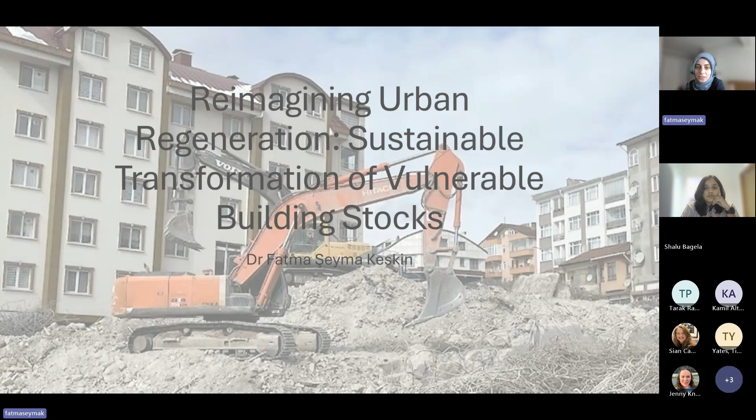Okay, so I will talk about reimagining urban regeneration for sustainable transformation of vulnerable building stocks.

Shortly, I will talk about myself. I'm currently working as a lecturer in the architecture department at Mehmet Akif Ersoy University in Turkey. I teach courses relevant to architecture, like architecture projects, structures, building materials, statics, structure analysis, and earthquake factor in architectural design. I hold a PhD in civil engineering from the University of Birmingham.

I have conducted postdoctoral research on the CDAS project, Center for Development of Postdoctoral Researchers in Cities, Infrastructure and Energy project, at Cranfield University.

My research area includes designing and analyzing buildings for urban transformation, with a focus on enhancing sustainability, resilience, and circular solutions for construction demolition waste, particularly in response to disaster impacts. This is my recent research area as well.

So I'm currently working with two research groups from Turkey, one from Hacettepe University and the other from Gaziantep University. I am working as a researcher under the Seyma engineering and consulting company for the projects Hacettepe University is managing, and I also work with ALab company for the projects Gaziantep University is involved in.

So today I will mostly talk about Hacettepe University projects. Our research team focuses on the production of 3D concrete, the recycling of construction waste, and the characterization of end-of-life materials, which we refer to as materials passport.

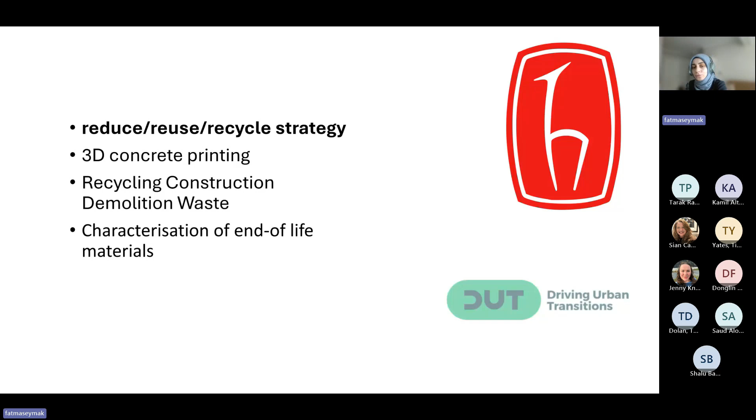Why do we aim for this material cadastry approach, material passport, for construction demolition waste? Because on February 6th, 2023, Turkey experienced two powerful earthquakes with magnitudes of 7.7 and 7.6. These devastating events caused widespread damage across an area of approximately 350,000 square kilometers, nearly the total area of Germany, affecting 14 million people.

This is about 16% of Turkey's population. The impact was immense, with approximately 400,000 buildings destroyed during these two earthquakes. In the aftermath, it is estimated that around 500 million tons of disaster waste were generated, highlighting the urgent need for effective waste management through reuse and recycling.

Furthermore, Turkey is in the midst of significant city transformation, for instance Istanbul, facing the challenge of replacing its substantial building stock. We have so many cities like that, not only Istanbul—nearly 90% of Turkey is under earthquake-prone areas, waiting for urban transformation of their vulnerable building stocks.

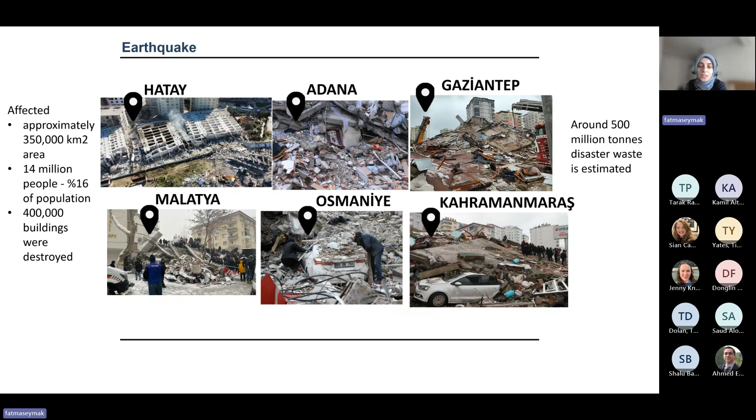This will result in high latent demand for raw materials and energy, leading to environmental and health concerns due to increased greenhouse gas emissions, carbon dioxide emissions, and the like.

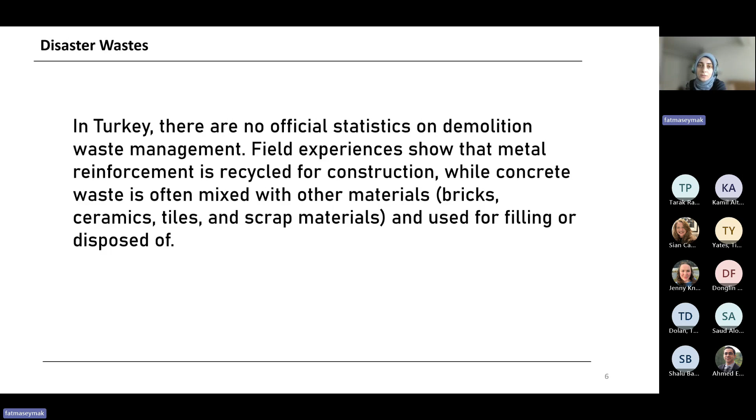So what is the situation in Turkey right now? We are very good at techniques related to construction waste, but there are no official statistics on demolition waste management or framework. Field experiences show that metal reinforcement is recycled for construction, while concrete waste is often mixed with other materials like bricks, ceramics, tiles, and scrap materials, and used for filling or disposed of.

What about the world situation? The recycling of demolition waste is being addressed within the framework of the circular economy policy in the European Union. In addition, the transformation of demolition waste into raw materials that can be used in the construction sector is one of the sustainable development goals that overlap with the United Nations Sustainable Development Goals.

How does it fit with these goals? Building resilient infrastructure, supporting sustainable industrialization, and strengthening innovation fits SDG 9. Making cities and human settlements safe, resilient, and sustainable fits SDG 11. And ensuring sustainable production and consumption patterns fits SDG 12.

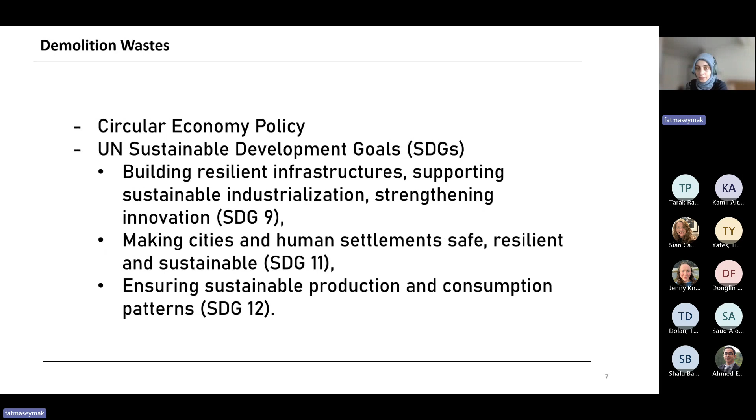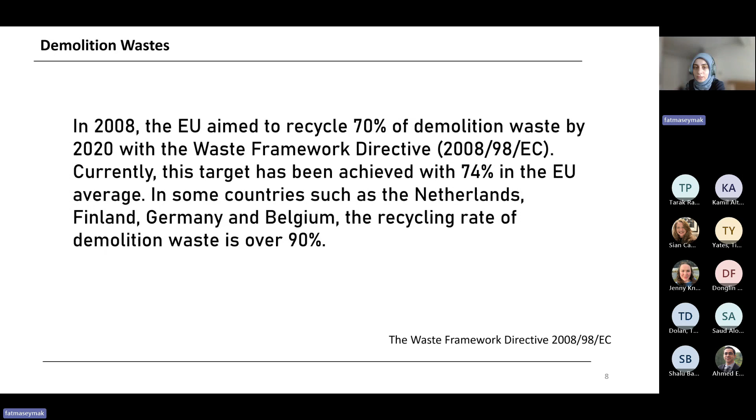In 2008, the European Union aimed to recycle 70% of demolition waste by 2020 with the Waste Framework Directive. Currently, this target has been achieved, with 74% in the European Union on average. In some countries, such as Netherlands, Finland, Germany, and Belgium, the recycling rate even exceeds this and reaches 90%. But here you can see the worldwide recycling rate.

In addition, the high level of risky building stock leads to significant increase in urban transformation efforts, resulting in more steel, cement, glass, brick, aggregate, and concrete production as well. This is because from 2020 these results apply, but we had this earthquake in 2023, so we have a huge amount of construction demolition waste. All this, along with the growing population and internal migration, increases negative impacts of the country's construction sector on the environment and natural resources.

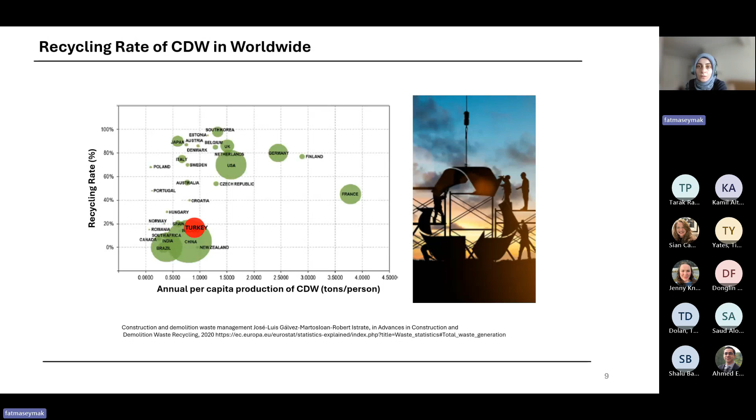Unsustainable and non-circular approaches in terms of consumption and production bring so many challenges for these issues. That's why our researchers are focusing on this construction demolition waste.

What is the difference? Well, we are talking about disaster waste and demolition waste, and all the countries involved in this construction demolition waste approach are trying to reuse or recycle their waste, but there are two differences. Demolition-based waste results from building demolitions due to the end of useful life and natural disasters. So there are two ways.

Originating from the same source, but exhibiting significant structural differences. When we talk about controlled demolitions, hazardous and valuable materials can be gradually separated. It means it's not happening after a disaster - the building can be vulnerable, or the building can be at the end of its useful life. So controlled demolitions can be applied there, and you can do separation properly.

But disaster-related demolition waste includes mixed building materials - personal items, hazardous and non-hazardous components. So you have to follow a different kind of way to separate these components. It is mostly ruins, because after an earthquake the building is demolished, it's all ruins and you need to separate them. It's quite difficult when we compare it to controlled demolitions.

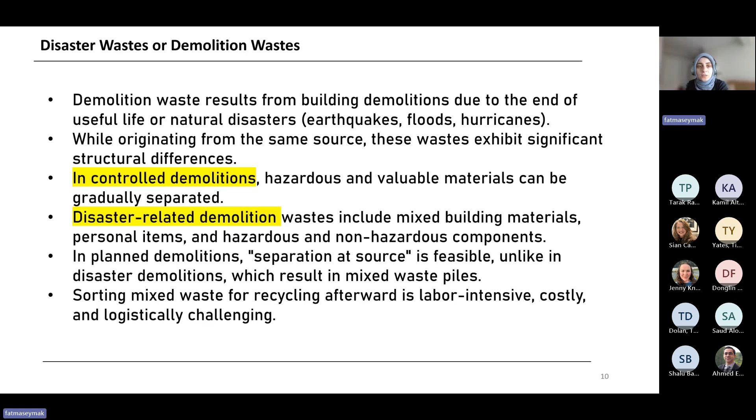In planned demolition, separation at source is feasible, unlike in disaster demolition, which results in mixed waste piles. Sorting mixed waste for recycling afterwards is labor-intensive, costly, and logistically challenging.

Recycled demolition waste can be repurposed in cement and construction production, leading to reduced carbon footprints and economic benefits. As concepts like resource efficiency, circular economy, and zero waste gain traction, the market for recycled demolition products is projected to reach $150 million by 2027, with recycled concrete aggregates expected to dominate this market.

When we look at how we reuse or recycle metals, scraps are mostly considered, but concrete will continue to be needed for our buildings, as even steel structures will need concrete and cement. That's why concrete aggregates take up a huge part of this demolition waste market as well.

So we can say demolition waste is not waste, but an important raw material for the construction industry.

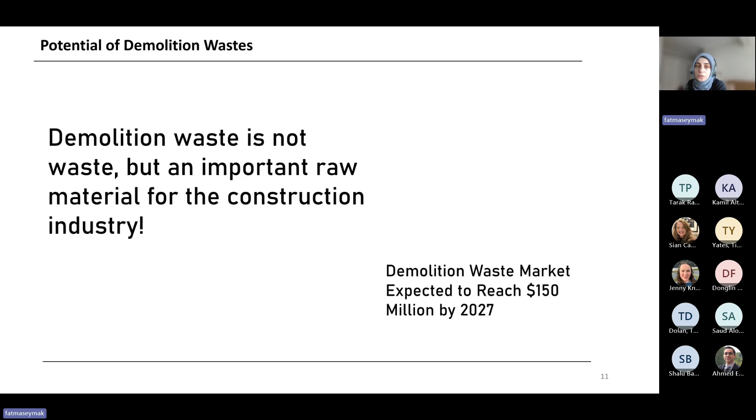Regarding Turkey, we have disaster waste. The recent earthquake generated more than 500 million tons of mixed construction demolition waste. We have immense knowledge in recycling of separated waste. Disaster waste should be separated for effective recycling - this is an area that needs to be developed as well. In Turkey, sorting and separating technologies are well developed so far, so we are ready to use this recycling of disaster waste to integrate into the circular economy by developing green construction materials.

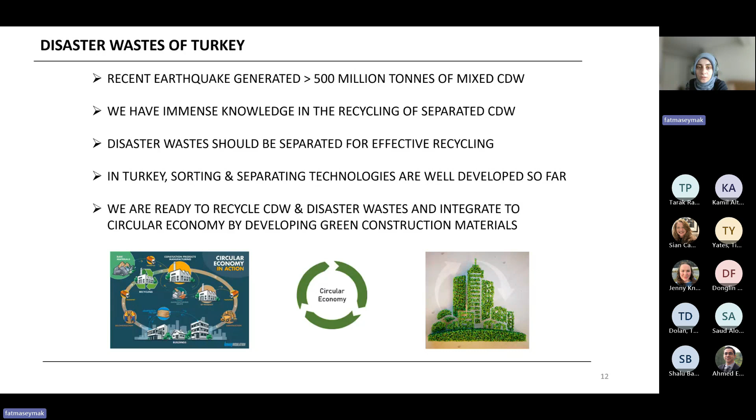Let's look at what we have from disaster waste. The investigation at the earthquake site has revealed a staggering 500 million tons of mixed earthquake waste. This includes concrete, stones, tiles, bricks, glass, plastic, aluminium, automobile parts, and even mixed household waste.

The entire process involves collection, sorting, upcycling, and the production of new upcycled products. Additionally, there are detailed processes such as storage, import, export, and the impact of utilizing secondary materials on humans and environment. One of the challenges posed by disaster is that these materials are mixed in the affected area, including so many other materials. Due to this complete mixing of waste, it is imperative to carefully separate them according to their types.

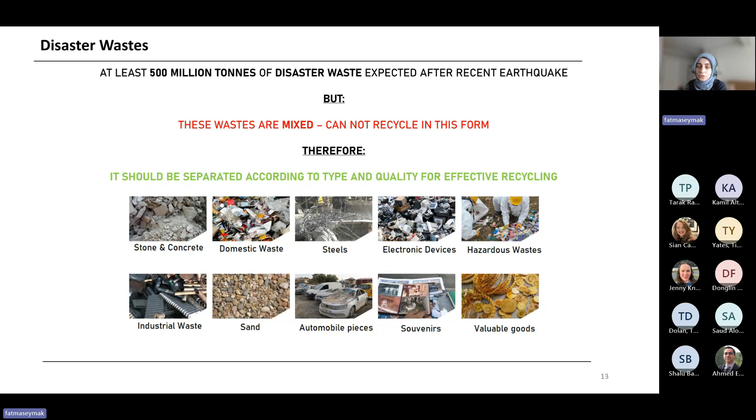So this is how we separate this waste, starting the disaster waste process. Here is the crushing process taking place with machines in the waste storage area. They are collecting with these machines from the ruins or from the waste storage area.

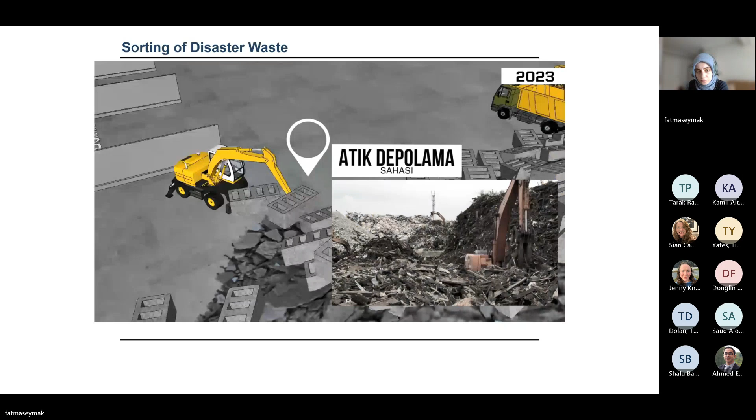Here are the coarse materials in earthquake waste, collected and separated in the sieves here, as you see.

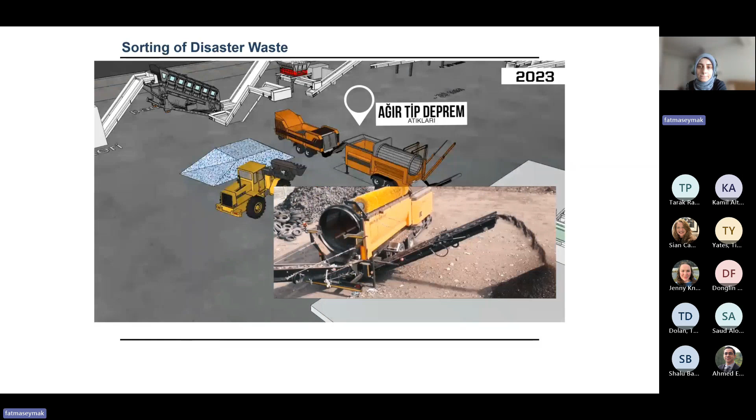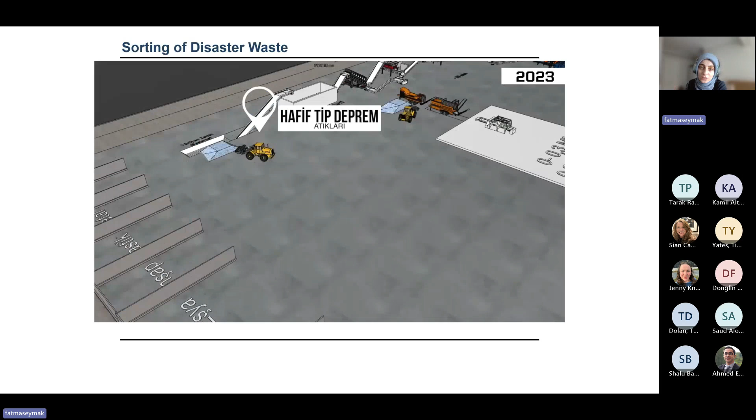So it's separated into different sizes. At the end of the process, the rubble is separated into different sizes. For the production of concrete, we need different sizes, used for different kinds of concrete or other kinds of production.

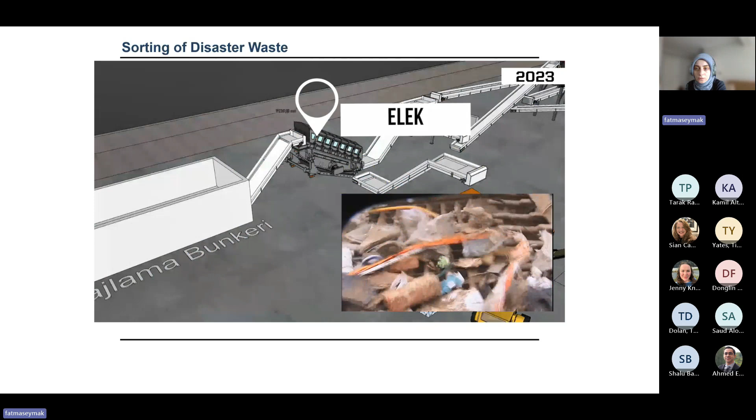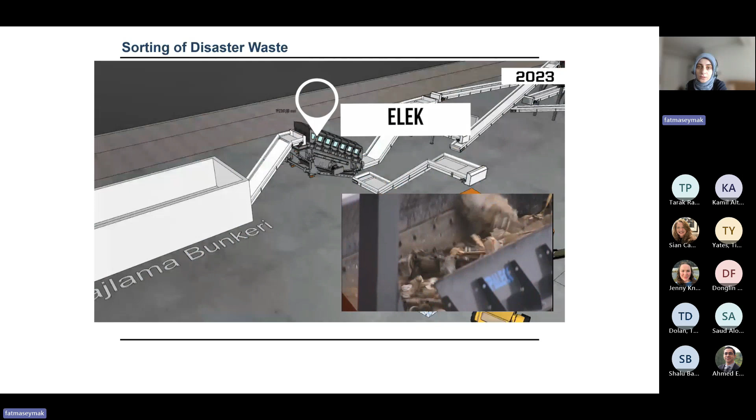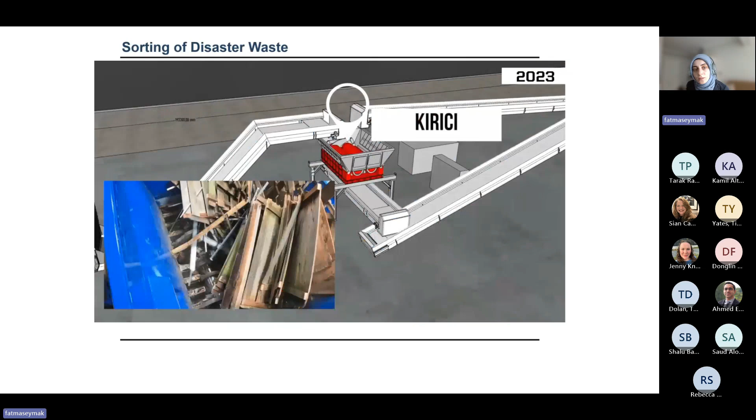These are the sieve processes again, for not concrete but more light metals separating here, and crushing process as well, maybe wood or other kinds of materials in the sieves. As you see, there's so many different materials there, and crushing process here as well, so much mixed products.

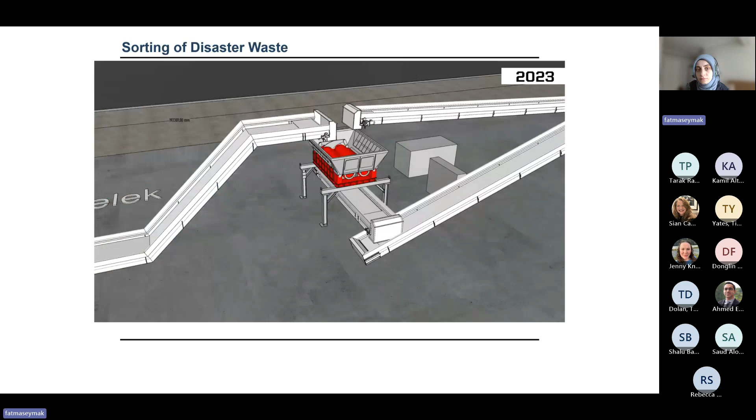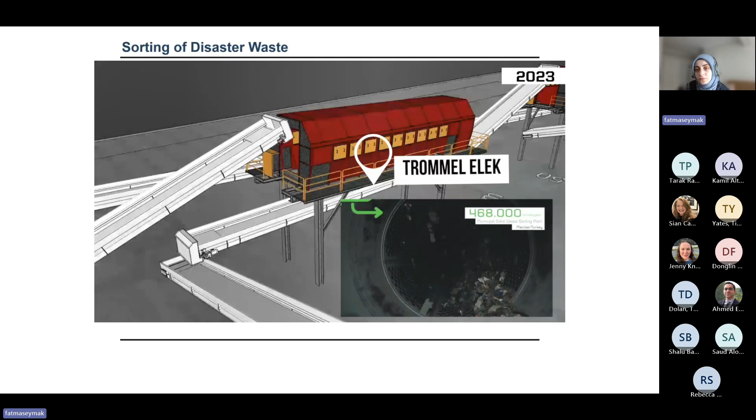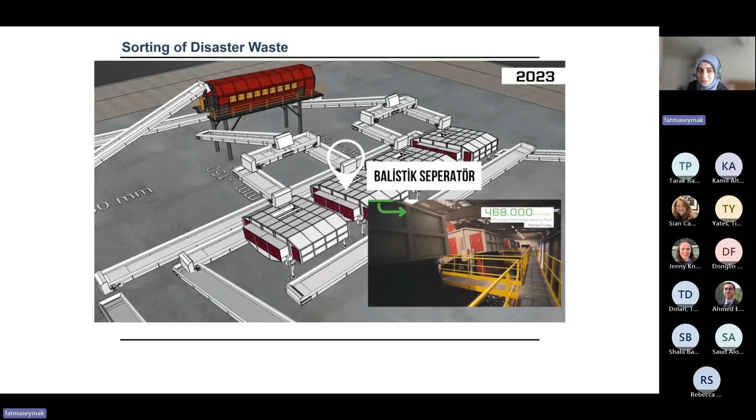Again, some other kind of selection process is separating the materials. Here there's another sieve separating the waste between 15 centimeters and 30 centimeters, and different kinds of separation processes here for each of the sizes, for each of the materials.

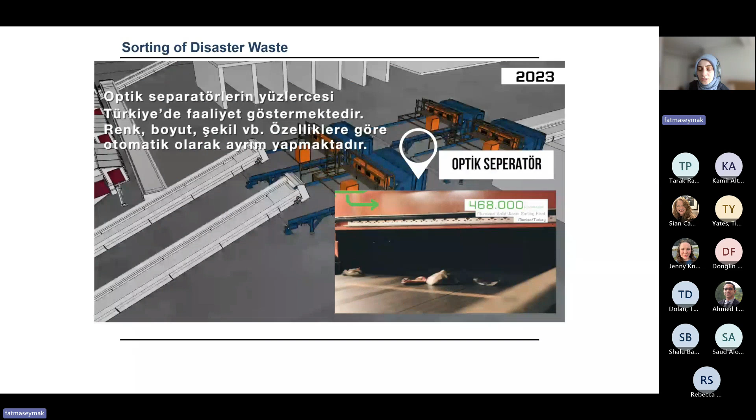Here is the optic separation. It looks at the color and size of the material and separates according to this, like with 2D or 3D screening happening there, and they make separation according to its colors and physical features.

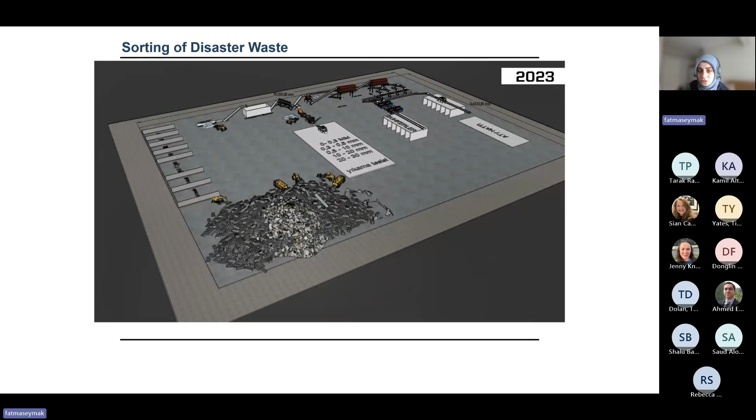So after separating these materials, how are we using them? Here you're going to see some current practices in Turkey. There are many different areas these recycled materials are used. One of them is mostly asphalt coating, road construction, brick production.

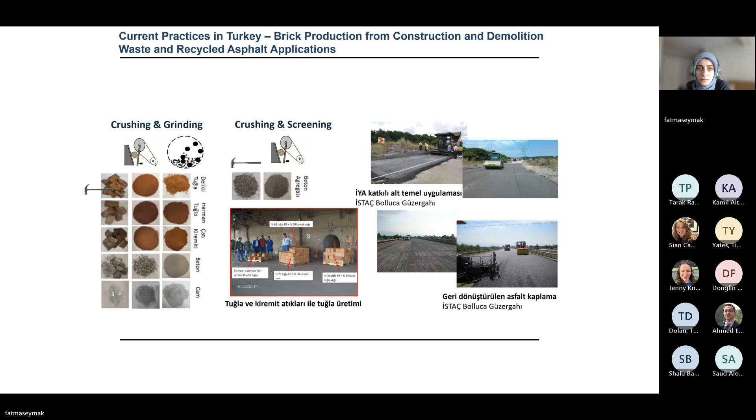Another one is recycling of wood waste and producing wood panels, like here. The wood waste turned into wooden fiber, and then adding some alkali solution and other chemicals, panels containing waste wood chips can be produced from this material.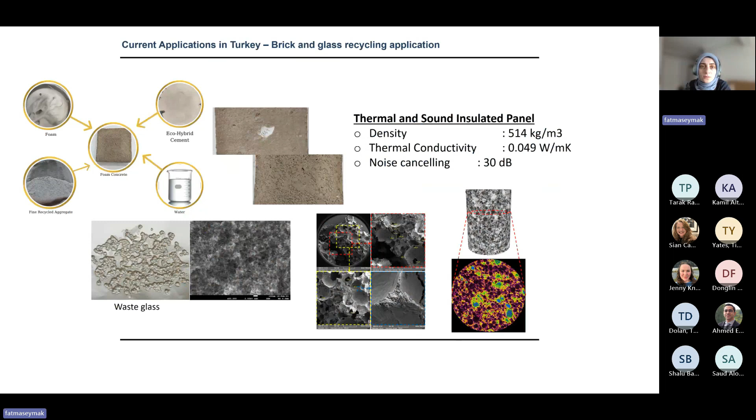What else? Like some modular system designs, waste building elements that can be dismantled and rebuilt in different locations, called modular system from construction waste.

As you see, there is a Lego construction system of green structural elements for low-cost housing, like development of new generation binders with construction demolition waste-based materials that can be practically dismantled and rebuilt in different locations. High level of strength and durability can be achieved, high mobility allowing it to be built where needed as well.

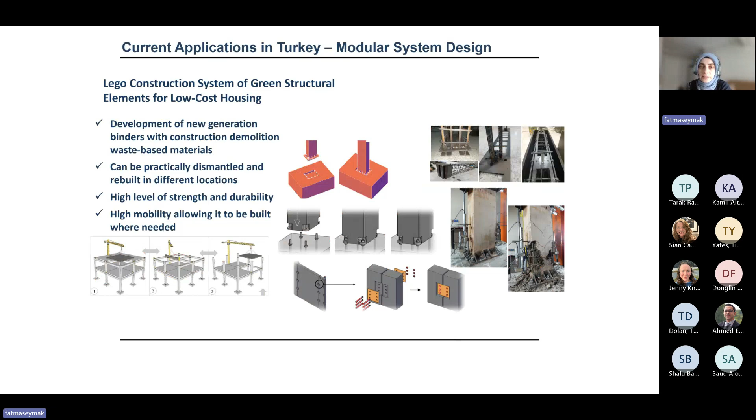So here, Prince Edward visited the university for Turkey's first recyclable housing system project. This Lego system with green structural components for low-cost housing was a project funded by the Newton Katip Çelebi Fund. Then it won the International Newton Prize in 2020 as well.

The other one is single-story residential construction. Again, here construction demolition waste is used for the removal and reassembly of some structural elements, and a single-story residential building was built there.

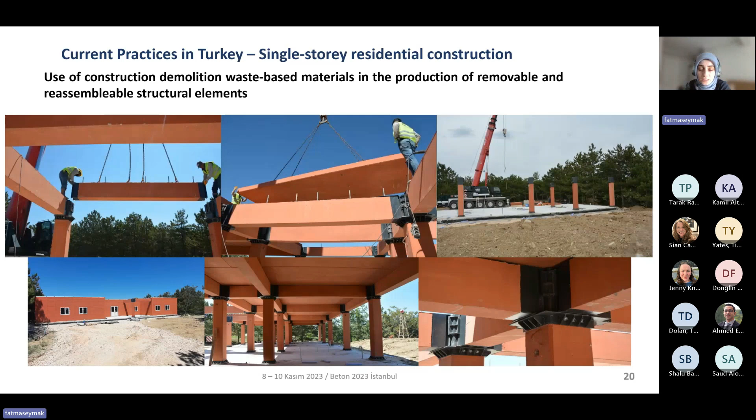The other one is 3D printing. So integrating 3D printers into the construction industry and using best-in 3D printing technology, we can produce some post-disaster shelters, because as you know, 3D printing technology is quite fast. That's why it can be used for immediate construction of post-disaster shelters as well.

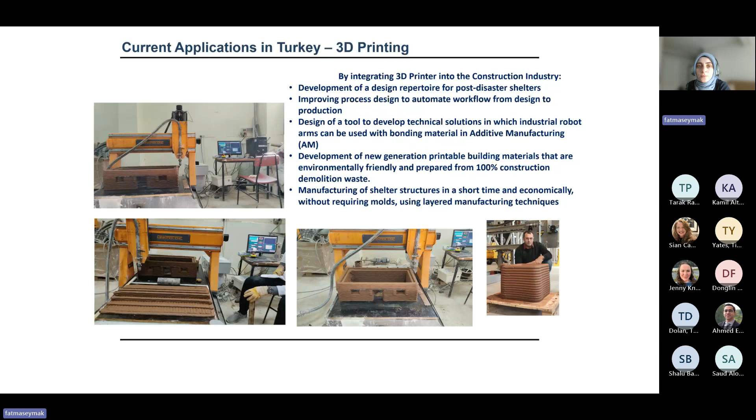What else? Development of new generation printable building materials that are environmentally friendly and prepared from 100% construction demolition waste is another benefit we can say, also economically feasible as well.

So in this laboratory there is some testing happening, like test facilities for mechanical and durability performance assessment, development of reinforcing strategies, implementation of modular systems on 3D printing walls, examination of seismic performance demonstration, so many other tests can be done in this laboratory.

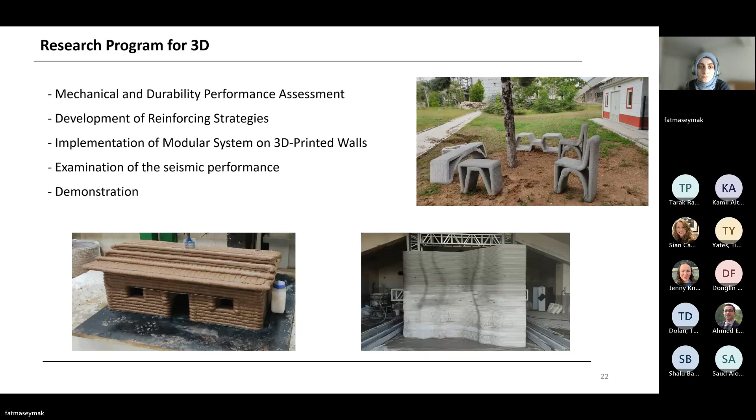So here is the 3D printing process. What is the difference from other 3D printing processes? Because it includes construction demolition waste 100%.

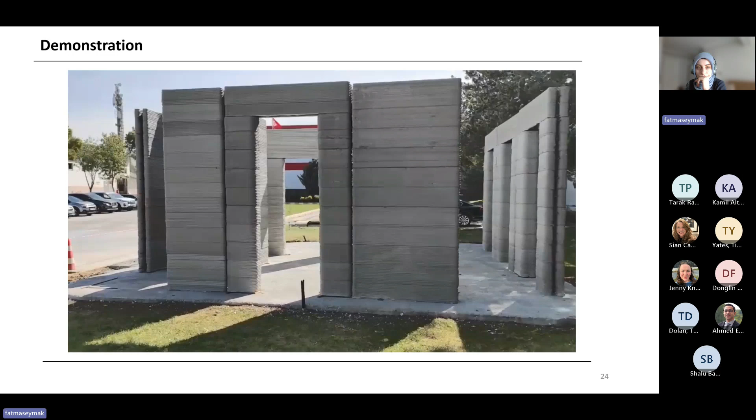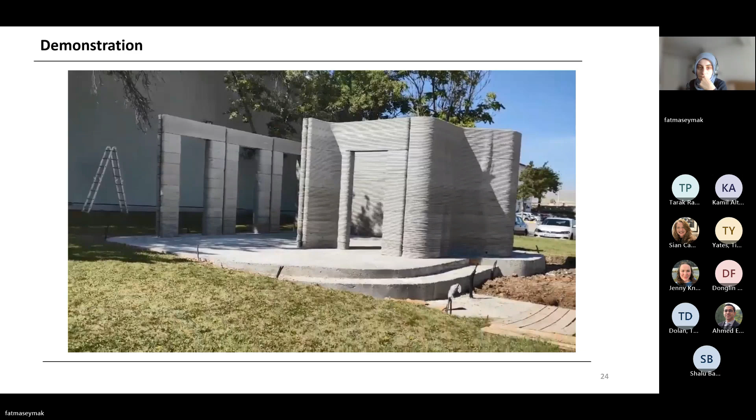As you see, it can be built very fast, these walls for the buildings. You can see this project.

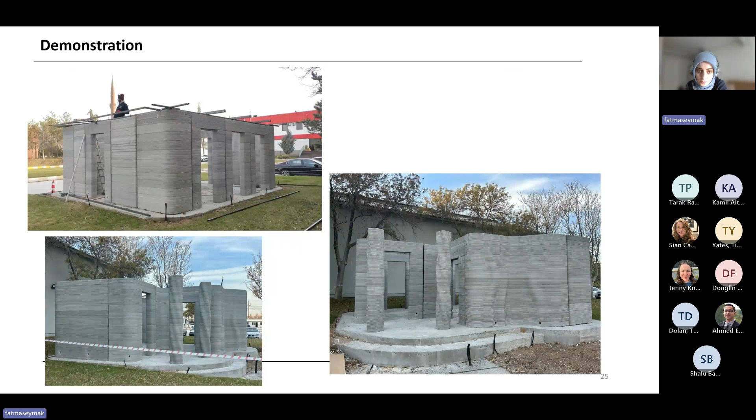What about controlled demolition? We've talked about disaster waste till now, but if we need to make controlled demolitions, especially regarding Turkey, we have quite huge vulnerable building stocks, and mostly it's their age or lack of structural strength and durability that makes them susceptible to future disasters.

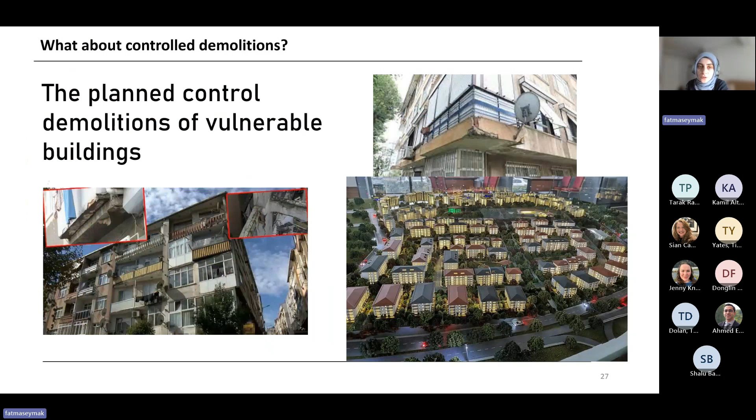So urban regeneration projects aim to demolish these buildings and replace them with new ones. This picture shows people still living in these buildings, but they are quite vulnerable. After the building is demolished, the other picture shows how it can turn into new urban regeneration areas. So this is the general picture from Turkey's situation relevant to vulnerable building stocks and urban regeneration.

So I will give one example from Istanbul. This is waiting for urban renewal before the expected earthquake. Population is more than 15 million, nearly 16 million, in Istanbul. I took this example because it has the highest population, but we have so many other cities waiting for an earthquake, because Turkey is generally a very big earthquake-prone area. But this example gives you the main important issue relevant when we consider the whole country as well.

I want to just highlight this: we had two big earthquakes, and it was huge, and we have nearly 500,000 tons of waste there. They are certainly sorting and trying to reuse and recycle. The work is going on there, and all the power of the construction industry in Turkey is trying to manage this waste, but we also have vulnerable cities waiting for urban regeneration, and we have a huge amount of vulnerable building stock as well.

So here is the Istanbul example. Huge population, many neighborhoods, a number of buildings, about 7 million, 500,000. And estimated risky buildings is 600,000. It means these buildings were tested and reported as risky buildings, and this needs to be demolished. This risky figure is 600,000, but many experts say it is more than this actually.

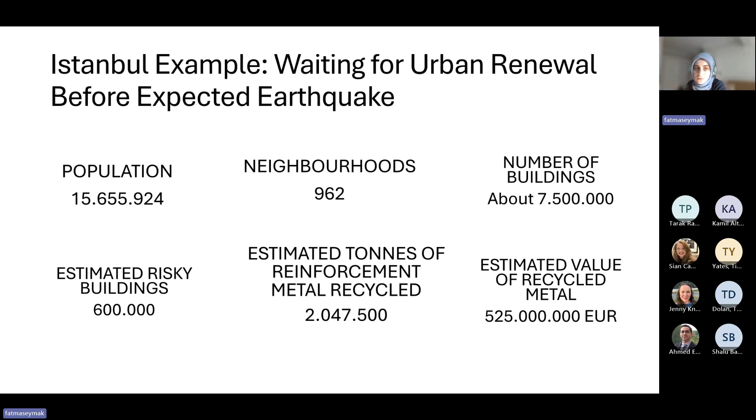What is the relation with circular economy? As I said, this is a huge amount of money, 525 million euro just for 600,000 buildings. So this is related to circular economy, as it includes actions to prevent waste during the design phase, and it not only reduces the waste but also enhances resource efficiency, contributes to reducing carbon and water footprints, as well as waste disposal costs, creates new job opportunities in reuse and recycling industries. Products and materials re-enter the economy, boosting the country's economic growth, and supports sustainable development by maximizing the life cycle value of resources. That's why we need to also consider circularity of these waste materials for the Turkey case.

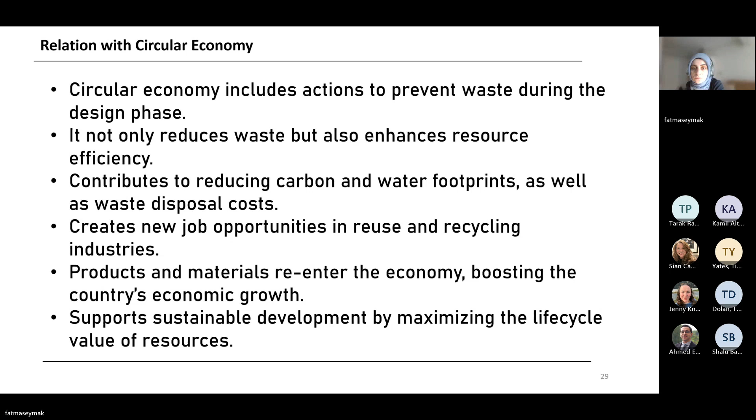So till now I talked about heavily damaged buildings after earthquakes, but we demolish heavily damaged buildings or heavily at-risk buildings for urban regeneration. However, there are also buildings that do not need to be demolished despite being damaged. In general, these damaged buildings fall into two categories: low damaged and medium damaged. My PhD also focused on this topic. I developed a method based on the concept of structural intervention, which involves structural retrofitting and reconstruction of buildings.

Because for a low damage building, you don't think about demolition, you just need to strengthen the structure. But for a medium damage building, retrofitting should ideally not exceed 40% of the cost of constructing a new building. This is essential for ensuring feasibility. By utilizing this construction demolition waste, we can further reduce retrofitting costs and make it an economically viable option. Right now, this is a big challenge for medium damage buildings because, especially in earthquake areas, the recent earthquake area, most of the buildings needed to be demolished, even though they could maybe be saved with retrofitting, because construction cost is quite high and structural retrofitting cost is also increasing in this way.

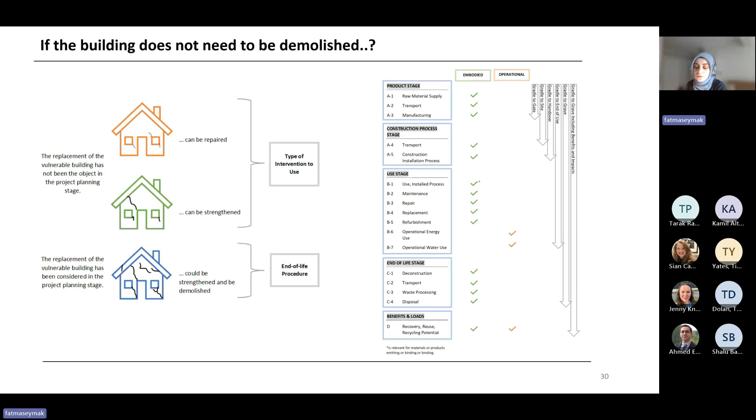So it also needs to include not just circular economy, but also LCA of buildings, to understand the tracing mechanisms of these materials as well. In this method, vulnerability of buildings is incorporated into the sustainability concept by generating scenarios related to damage cases and customizing LCA stages according to these scenarios.

For a low damage building, we only think about structural retrofitting. There are so many alternatives because the technique is highly developed. For structural retrofitting, we have many options, so we can compare their environmental impact, like reinforced concrete jacketing and steel jacketing for damaged columns, since there are several methods for this. To achieve the best choice, we can compare these different structural interventions.

But for a medium damage building, as I said, there is a structural retrofitting option, but also a new building scenario. Cost is an issue that helps us make the decision, but if we can reduce the cost for retrofitting, we can make benefit from the cost and environmental perspective of the building as well.

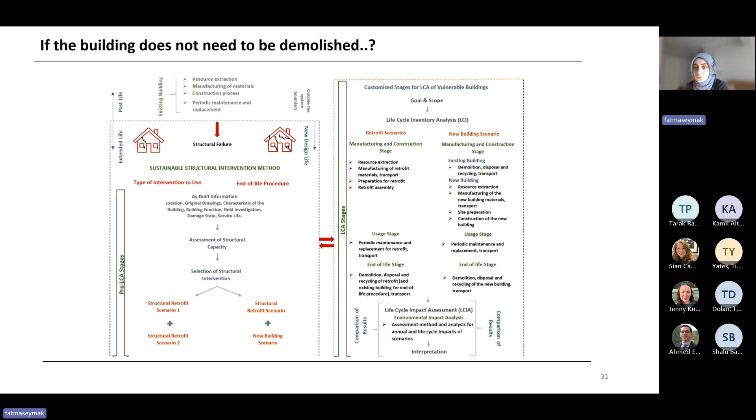Here you can see some customized stages for life cycle analysis, when we think about demolition and building a new one, or keeping the building and strengthening it with structural retrofit options, and how that can affect things.

There are two components: embodied energy and embodied carbon. Embodied carbon can save 2 buildings, and embodied energy can save 4 buildings. Retrofitting buildings is a powerful tool for creating a more sustainable future, as we see.

If we think about this disaster-prone area, we have 500,000 medium damage buildings in our earthquake areas. So just saving these medium damage buildings with retrofitting options, and utilizing this demolition waste, we can further reduce retrofitting costs and make it an economically viable option.